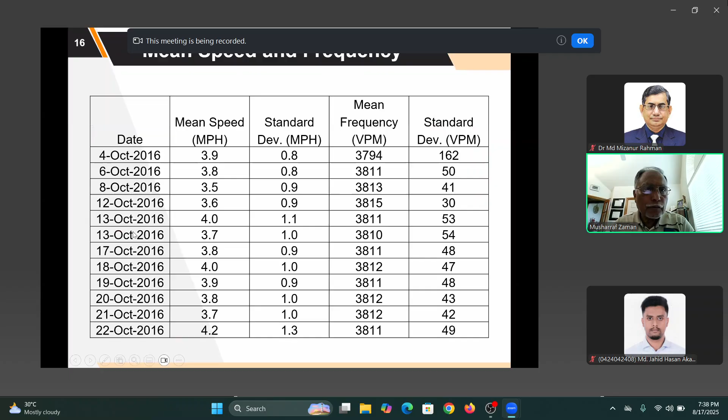So this particular technology that we have is called intelligent asphalt compaction. And the one that we have, and we have a patent on this particular technology, is called Intelligent Asphalt Compaction Analyzer. It is abbreviated as IACA. And what does it do, this particular technology?

It's essentially a tool for quality control of asphalt pavement during construction. That's important, during construction.

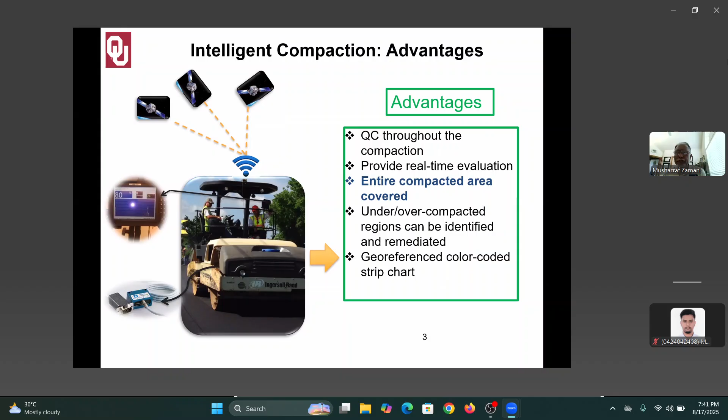So overall, I'm going to give you a very brief description of what it is. This technology is based on vibration. As you know, this compactor - I'm sure most of you have seen pavement construction - it is a vibratory compactor.

The compactor has kind of an eccentric weight. It vibrates, so that vibration - what we are doing is we are recording the vibration in real time.

So we have an accelerometer that measures the vibration, and then we have tools, and of course we have GPS, and also we have a temperature sensor, because temperature is also extremely important in this process. So the GPS antenna looks at the location, then vibration of the compactor is recorded in real time, and also the temperature, and then it is processed also in real time, and then it displays the level of compaction.

Now, one thing is very, very important to note here - so you're compacting the asphalt layer that you're constructing, but it is placed on other layers, right? As you know, asphalt pavement is a layered system. So you have subgrade at the very bottom, then you have some base and sub-base, and on the top you're doing your construction.

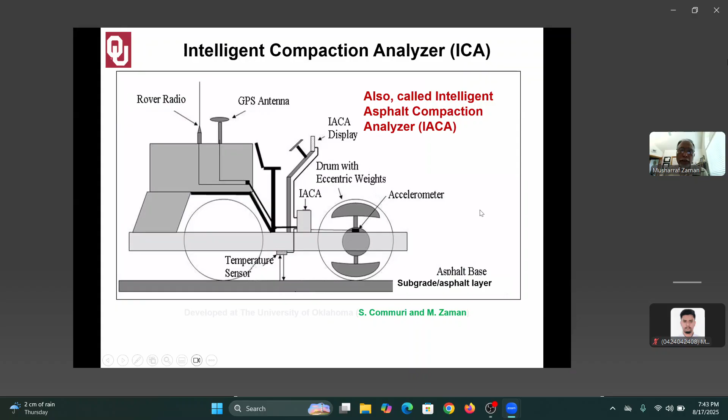So actually this vibration, as you know, it's a coupled system. So how the compactor is going to respond depends on what you have below. So it's a coupled system, that is something. In other words, as you're compacting and the asphalt layer is getting more densified, the nature of the vibration is changing. So there is a video here that will tell you.

I hope that you can listen. You have the sound also.

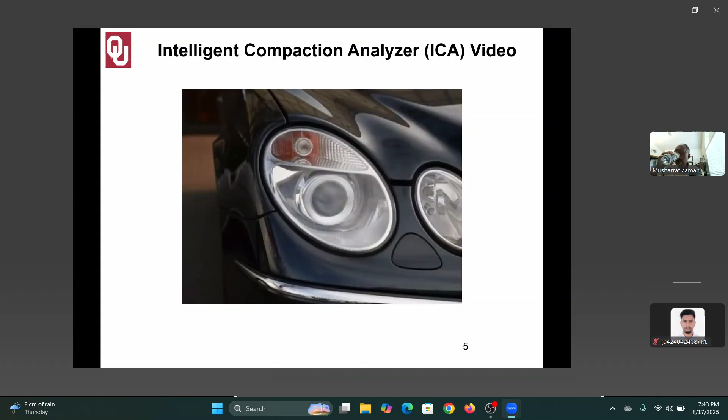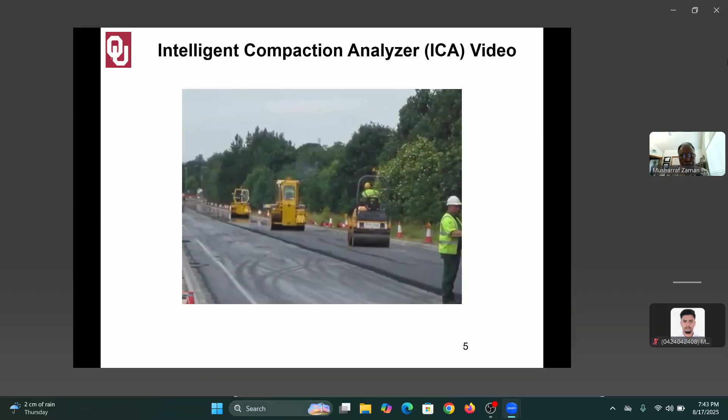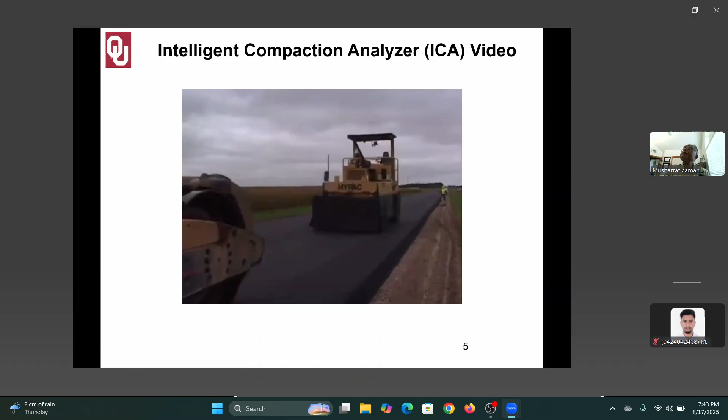We expect performance and long life out of so many things we buy, from our computers and appliances to the vehicles we drive. Why not the same for the roads we drive on? Generally, pavement performance is not something motorists think about, but it is something pavement engineers think about a lot. And engineers know that achieving good compaction during construction is the most economical method of increasing the lifespan and performance of asphalt pavements. Compaction increases pavement density, which makes our roads stronger and less prone to cracking and rutting. Longer-lasting roads mean fewer work zones, delays, and lane closures. Better performance means a more comfortable ride.

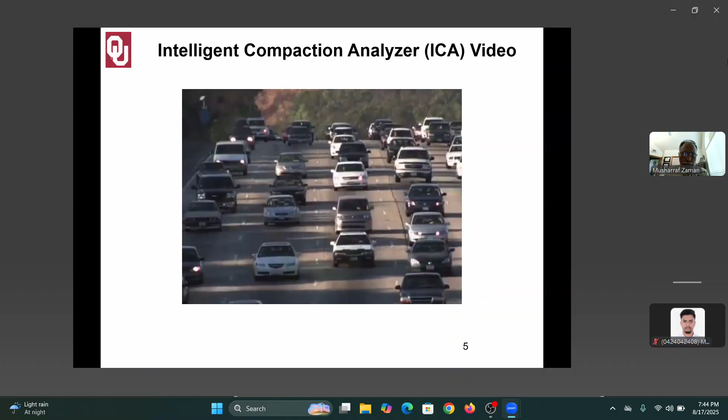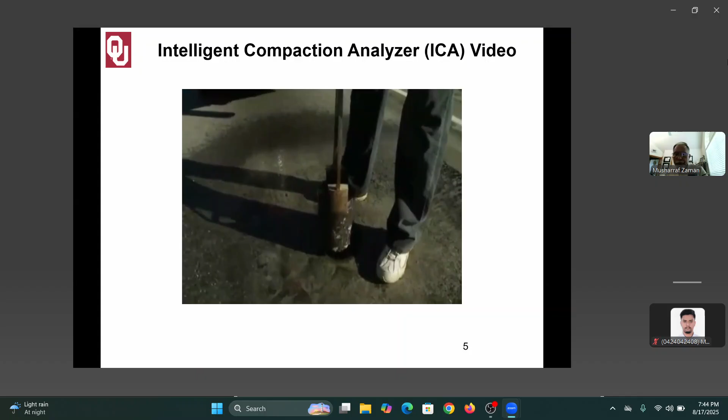Traditionally, asphalt pavement is tested for density after rolling operations are completed. Conventional quality control techniques are often time-consuming, costly, and can be destructive. Pavement cores are extracted and analyzed after completion of the operations. This method checks the pavement at individual points and does not reflect the overall quality of the entire asphalt pavement.

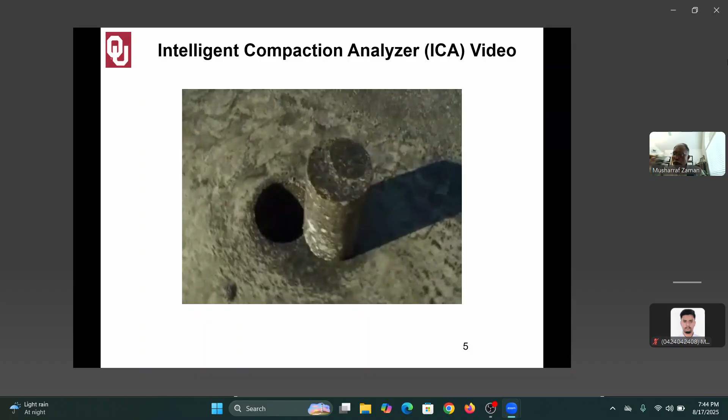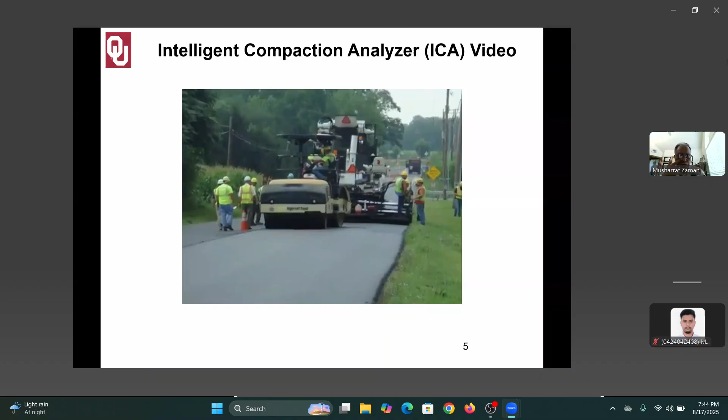The Intelligent Asphalt Compaction Analyzer, or IACA, is a roller-mounted device that provides real-time data on compaction inconsistencies during construction of asphalt pavements. The Highways for Life Technology Partnerships Program provided a grant to Haskell Lemon Construction, in partnership with the University of Oklahoma, to refine and test the IACA technology.

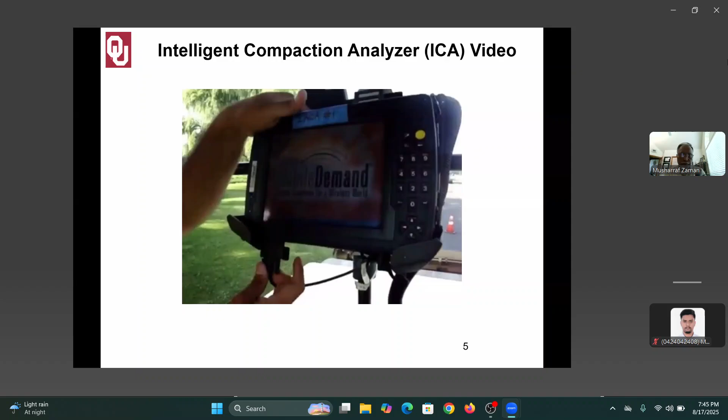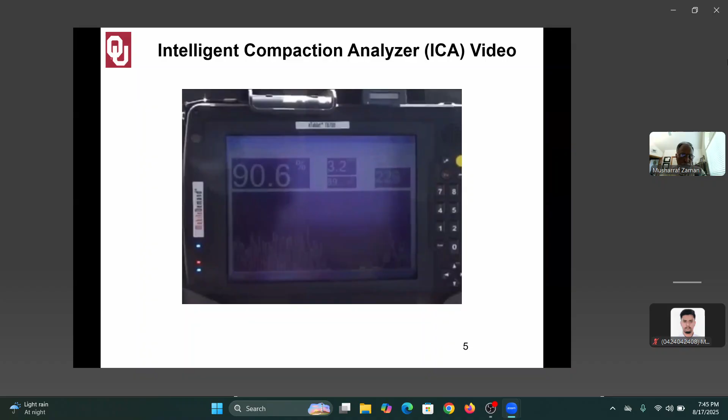The prototype, consisting of a global positioning system receiver, an accelerometer, and a rugged embedded computer display, is easily installed on a vibratory compactor. When mounted on the asphalt roller, the IACA analyzes the pavement's response from the roller vibrations in real time, estimating pavement compaction while the pavement is still pliable in order to address issues relating to compaction.

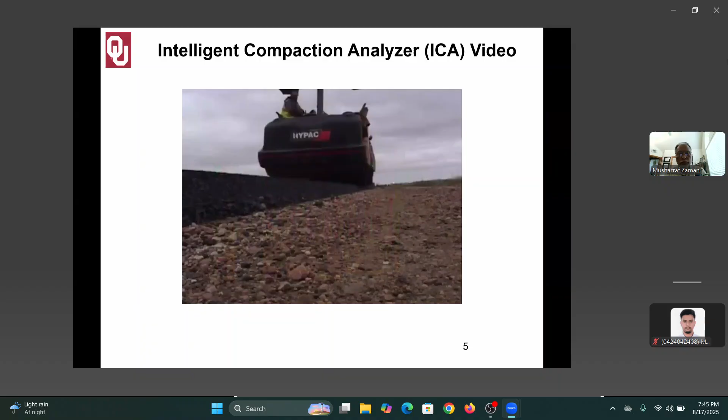Density information from the final pass of the roller is used to compile the density of the pavement, and the color-coded map display is easy to read, enabling roller operators to view the information on the monitor and determine when adequate compaction is achieved. The results of the evaluation and testing showed that the IACA could estimate the level of pavement compaction with accuracy suitable for contractor quality control operations.

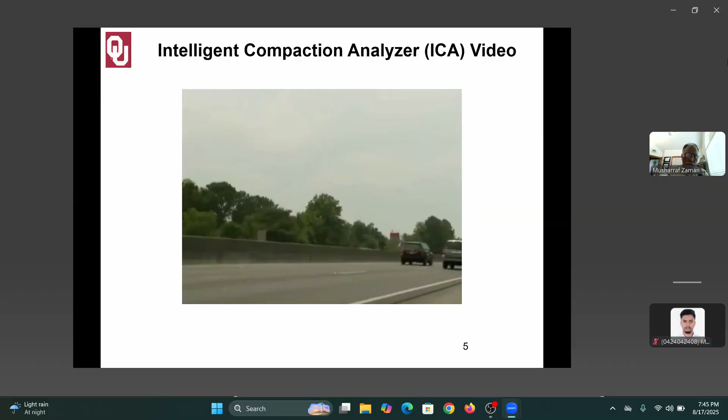The ICA can help improve the quality of asphalt pavements, increasing their life and reducing maintenance costs. It also increases efficiency and productivity on the job by reducing the number of conventional spot tests needed and excessive rolling. It takes the guesswork out of paving jobs.

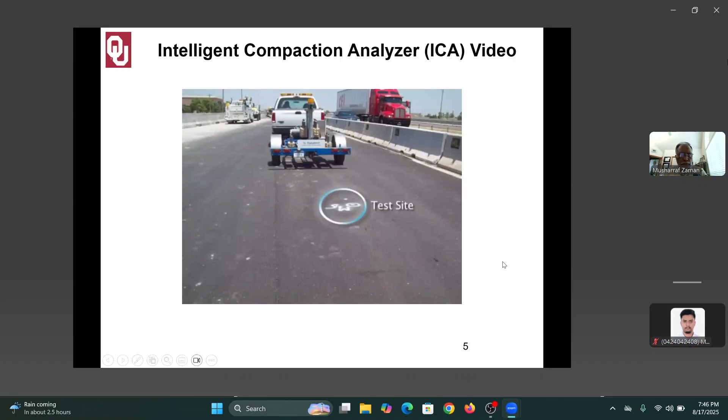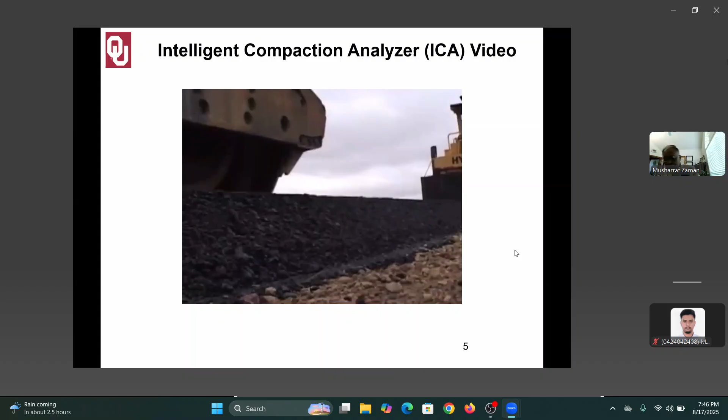Construction of properly compacted pavements will result in a long-lasting roadway that does not require expensive, time-consuming, traffic-disrupting reconstruction and major repairs. For motorists, this means longer-lasting roads and a smoother, more enjoyable ride.

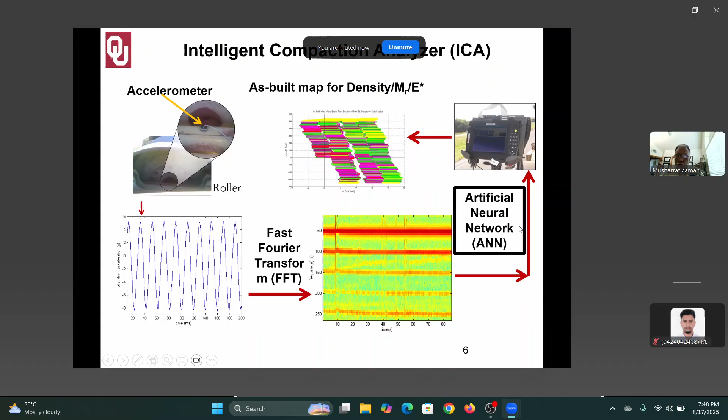So as it goes through the number of passes, it will recognize the level. So this is essentially what we have, and the results of the level of compaction is displayed, as you saw in the video, in real time.

Now there are a couple of terms that we use. CCV, this is the Compaction Control Value—that's one of the parameters that some of these intelligent asphalt compaction machines use. Or CCMV, the Compaction Control Machine Value, and things like that.

So I just wanted to make sure that you're familiar with this technology, familiar with these terms actually.

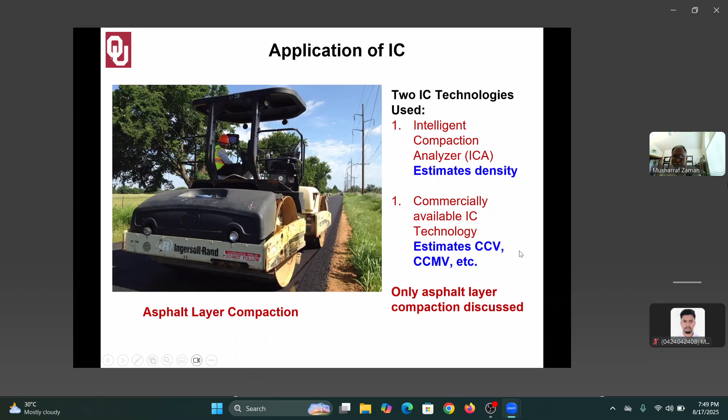Essentially what is happening, as you have seen in the video, is that it records the vibration, and in the very beginning, the first pass—that's called lay down—and then additional passes. So the very first pass is the lay down, and the machine itself, when it is laying the asphalt, that's what we call lay down density, and then additional compaction you receive through the vibration of the roller.

And even after the asphalt is constructed, still some additional compaction happens from vehicles, like big trucks and so on.

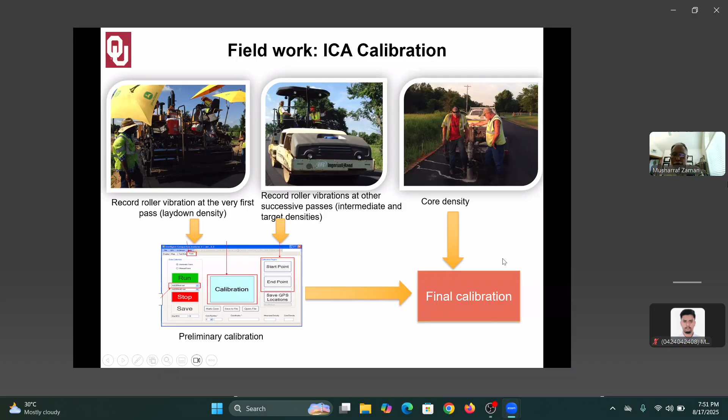So that's what you do. But in order for this technology to work, you have to calibrate. Calibration is the same type of thing as when we learn something - our memory gets information about new data, new tools. The same thing is true for artificial intelligence, neural networks. So the calibration part is extremely important. Your knowledge is as important as whatever you have learned. The quality of calibration will dictate the output that you get from an intelligent asphalt compaction analyzer. So how do you do that?

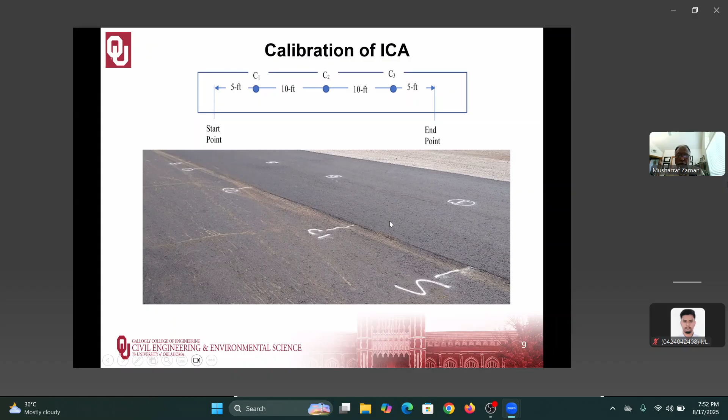So this is where we're taking cores. Of course, taking a core is a destructive process, so our goal is to minimize the actual coring. What happens is that as you do more and more construction and you are retraining this neural network model, it is becoming more and more powerful - the same way that as you learn new materials, you train yourself, your brain gets trained, and you become more experienced. Essentially, the same thing is applicable here for this technology.

So this is what happened. The software that's used to process the data is called VETA. We collect the data, and this particular software, by the way, anybody can use it - you can download it. It's a free download. So that's what we use in our case for processing the data.

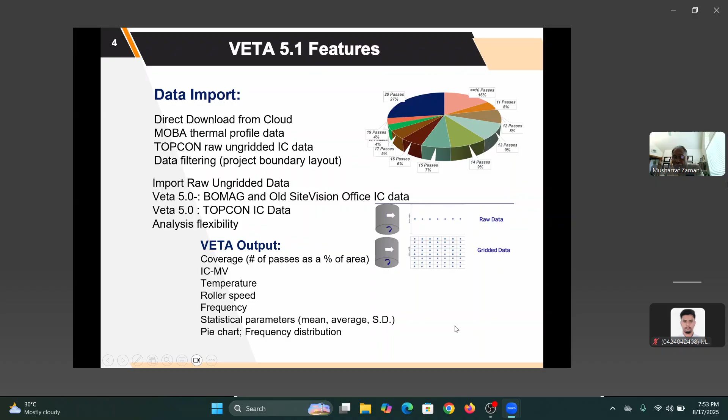Essentially what this software does is it takes the pavement like a grid, and then it tells you the number of passes - what areas received what number of passes, 1, 2, 3, 4, like that. It also tracks temperature, roller speed, roller frequency, and it gives you the data results as a pie chart. I think this is very helpful because this software is already there.

In our case, I'm going to present only one example. We have done this for a number of projects with my students, so I'm going to cover only one of the projects, Highway 38 in Oklahoma.

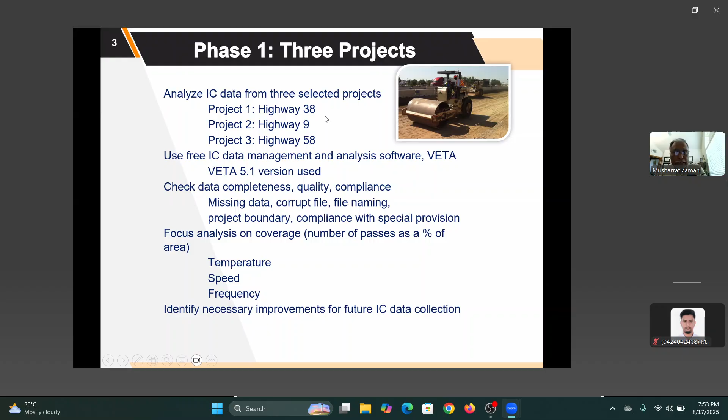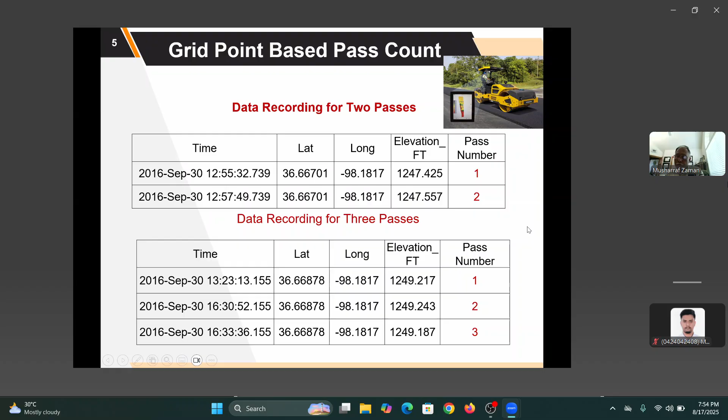So how does it actually know the number of passes? It is based on latitude and longitude. Because we have GPS, from the GPS it actually knows the latitude and longitude, which indicates the location of the roller. You can see that it matches exactly the latitude and longitude for the first pass, second pass, and in the second case, first, second, and third. So latitude and longitude are used as reference in this particular case.

In order for this to work, what you want to do at the end is find out what percentage of the road you're constructing received one pass, what percentage received two passes, what percentage received three, and whether your construction is maintaining quality. In our case, the Oklahoma Department of Transportation has limits - if you do a good job, you get a bonus; if you do a bad job, you get penalized. Our goal is to help these companies so they don't get penalized, they get a bonus instead.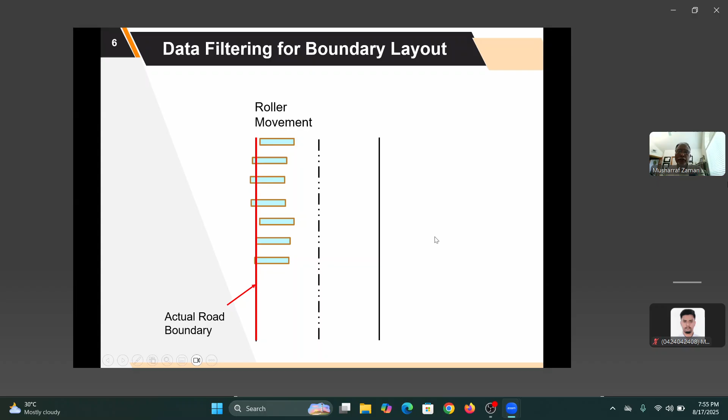So this is where it becomes a little tricky - you have a turn like this, as I have shown in this diagram.

You have to have the right boundary. That's it, right boundary, because otherwise whatever results you get would not be correct, right? So that's one of the things.

I want to show this example for Highway 38, one of the roads. This is an overlay type of project, width is 16 feet, about 11,160 tons. This is S4, the superpave mix S4.

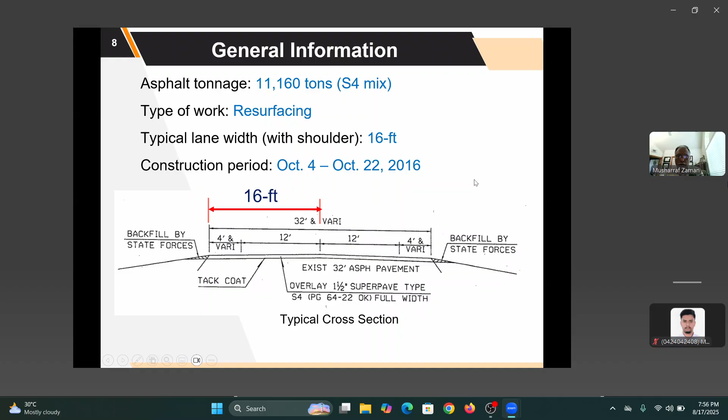I think we can talk about this, and Ashik may be able to cover more in his presentation. It's a resurfacing job, right? Quite a little. Yeah, so anyway you can see here the results.

I think this is very powerful. You can see here what is our target? Our Oklahoma DOT's target is that at least all of the areas should get 2 passes, right? 2 minimum. And you can see these are the passes: 1 pass, 2 passes, 3 passes, 4 passes, right?

On that particular day, October 4th, do you see that only 52% of the areas received 1 pass, 30% received 2 passes, and so on and so forth.

So what can happen sometimes, and this is a good tool because it is good for the DOTs to also see whether the contractor is meeting the DOT requirement or not.

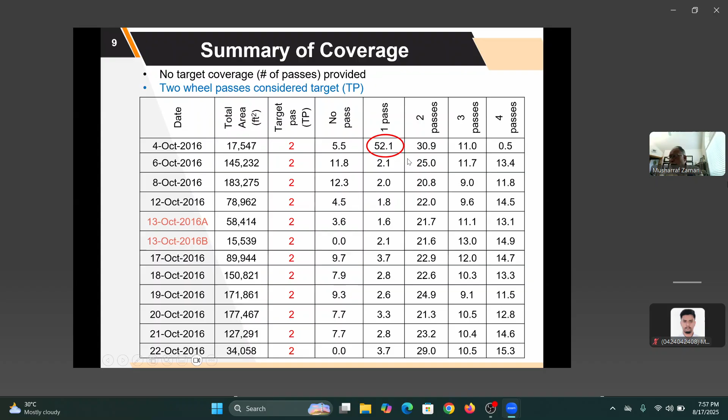One more important thing is that you do not also want to over compact, because that is also not good. If you over compact, there will be breakage of the aggregates and so on, right? So that would also not be good.

So that's why you have to have a limit, and you can see that on some days the contractor met the limit, and on other days they did not.

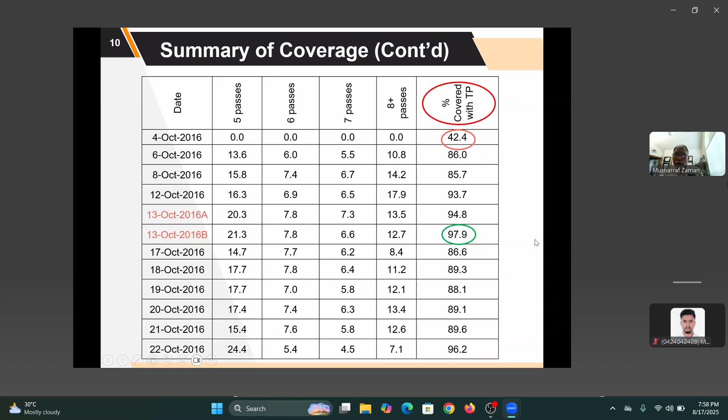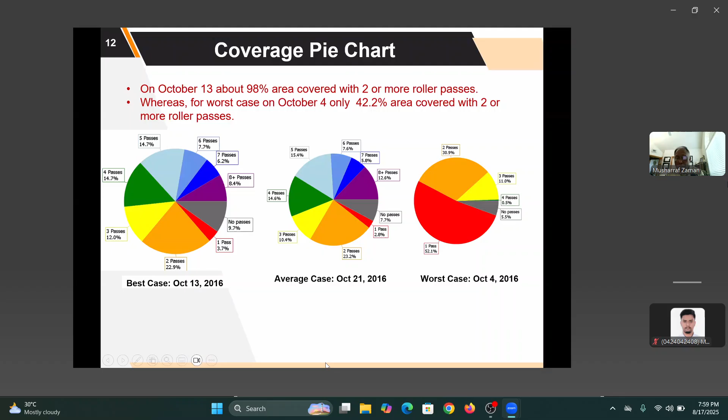In real time, so you have the opportunity to go back and fix that. If you have only 1 pass and your target is 2, you look at the area that received only 1, and you can correct it in real time, which is very difficult because you cannot do this once the asphalt has cooled down, you cannot change it.

The other thing is temperature. Temperature is very, very important, right? So DOT has a temperature requirement, minimum and maximum. You can see here that on some days they met most of the temperature requirement.

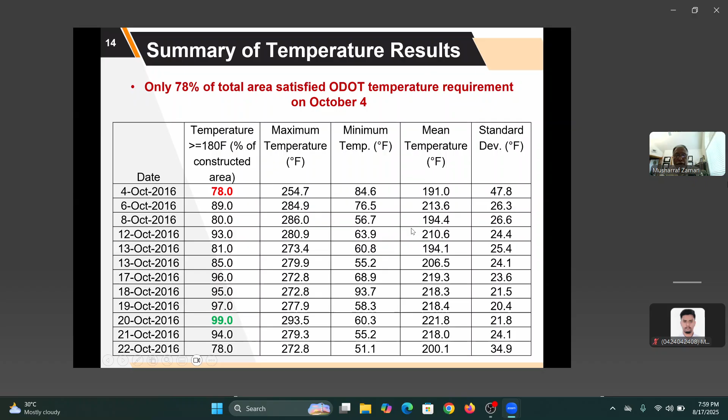This is again Oklahoma DOT. In Bangladesh, I don't know, you could probably have some temperature requirement as well. So on some days the temperature requirement was not met. Only 78% of the areas constructed met the temperature requirement.

And this type of tool also gives the speed of the roller, the standard deviation, and frequency of the roller. So these are, I think, very important.

You can see here, I think they did a pretty good job overall, right? You want to keep this as uniform as possible, right?

That depends on, I do not know if any of you have had the opportunity to actually be on top of a roller, like driving the roller - I did, it's very high up. It's like you're riding an elephant, right?

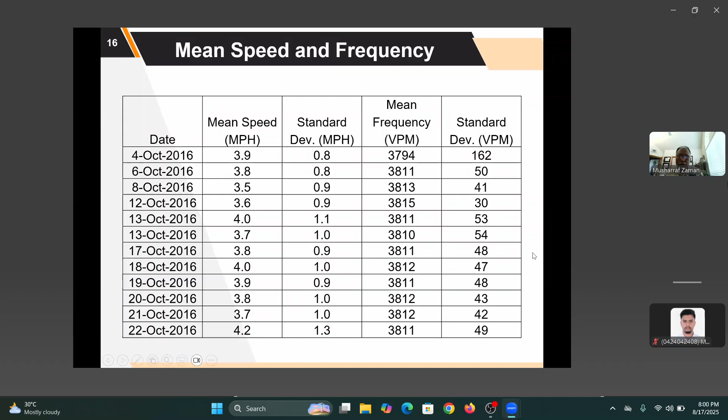You get this type of results also. So I'm not so... um.

Basically, I think in this case you can see that the results overall dependability was pretty good, because this is a difficult job, right?

You cannot expect if somebody says that I got an R-square value of 0.99. As Dr. Mizan said, that I am the editor-in-chief of a journal, so when I get that type of paper, I actually laugh myself because that's not doable.

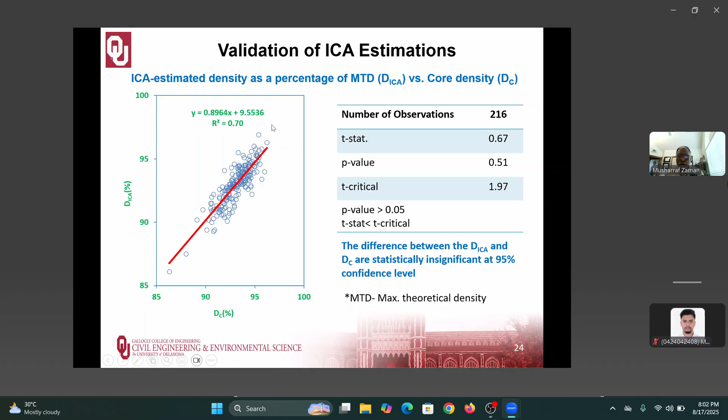So you can see here that our actual compaction, the density from the core, versus the density as predicted or measured by our system, ICA. We got R-squared equal to 0.7. I think that 0.7 is good. You cannot get 0.9, that's impossible. So we have to be aware of that.

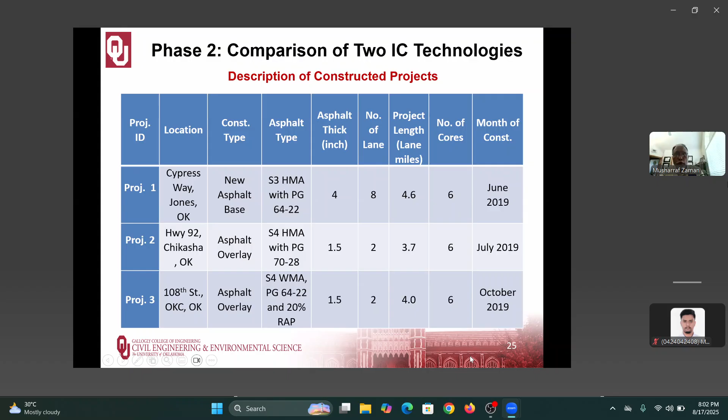This is kind of we have done a lot of different projects. I don't think there's a need to go through all of these because there will be differences. It depends on the operator. It depends on, sometimes the mix quality could also be a factor because some mixes are relatively easy to compact and others are difficult to compact.

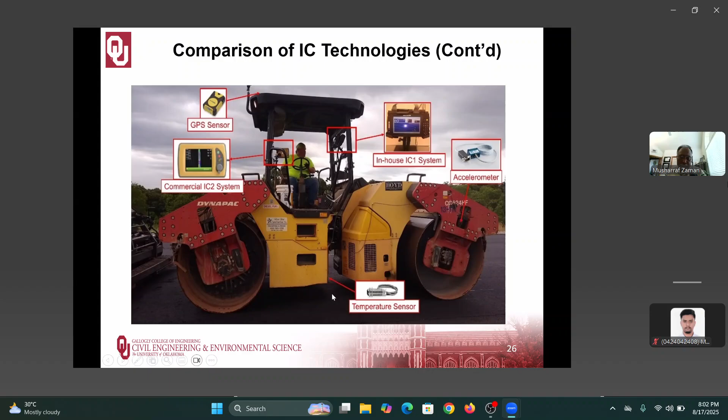There are different intelligent compaction technologies. I talked about the technology that we developed at University of Oklahoma along with Haskell Lemon Construction. So there are some comparisons. I'm not going to go over this, but I think I can make a copy of these slides available to you, so you can actually go over this yourself.

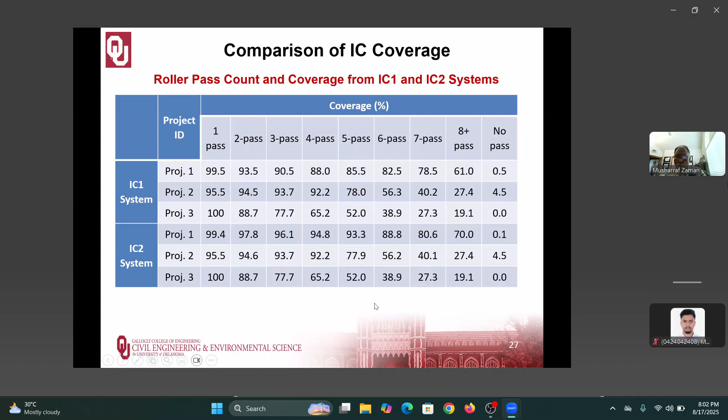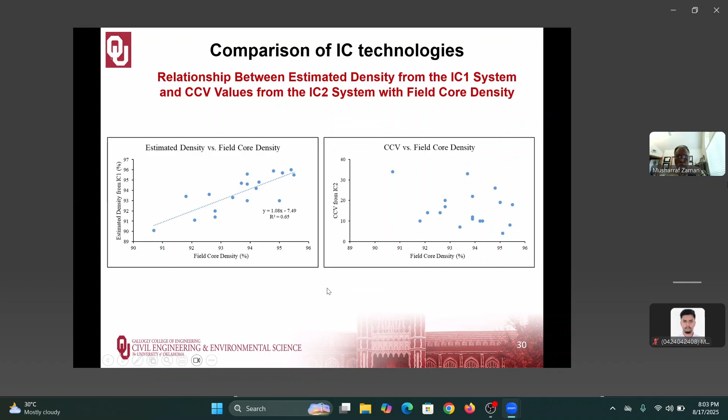So we have been working on this. Neural network is a very strange thing, right, like any other model, depending on what you are doing. If you use a regression model, for example, you divide your data into three parts. One part you use to develop the model, the second you use to check or validate, and the third used for prediction.

Usually regression models are very good for predicting the data that you used to develop the model itself, that makes sense, but not necessarily. So all of these tools have difficulty: if you are doing interpolation, it's good. But if you're doing extrapolation, meaning you face a situation you have not seen before, then you'll think twice before making a decision. Same thing is true for these neural network and other models.

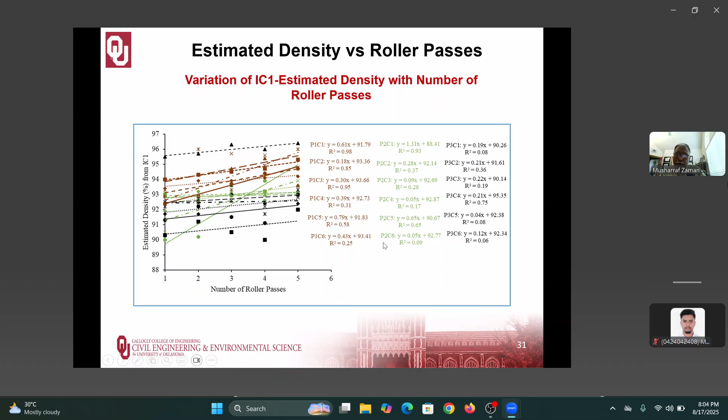There are all kinds of models, random forest model, you just name it. They are pretty good tools for interpolation, but not so good for extrapolation. That's one of the things. I'll share all of these slides with you.

Overall, I think this technology, intelligent compaction, is very helpful because you are able to look at the quality of a construction in an overall sense that you cannot do with the existing technology, spot checking. So it's like you're buying a shirt, but the shirt has a hole, but you did not look at that hole. That's the type of thing that's happening here.

You have to have the DOT, like here in Oklahoma, they have some standards, special provisions. We have to meet those, and if you meet or exceed them, then you get a bonus. If you do not, then you get penalized. So really, our goal is to help both the Department of Transportation, who own our roads and bridges, and also the contractors, because they are the ones who do the construction.

So we need to look at, and as I have indicated, your boundary is important, you have to look at your construction boundary properly. Otherwise, the percentage we are talking about, 80% coverage, all of those things would be wrong, because it's a very simple thing, it's geometry. So we have to define the geometry of a pavement properly, and then you can look at all of these, the compaction control value.

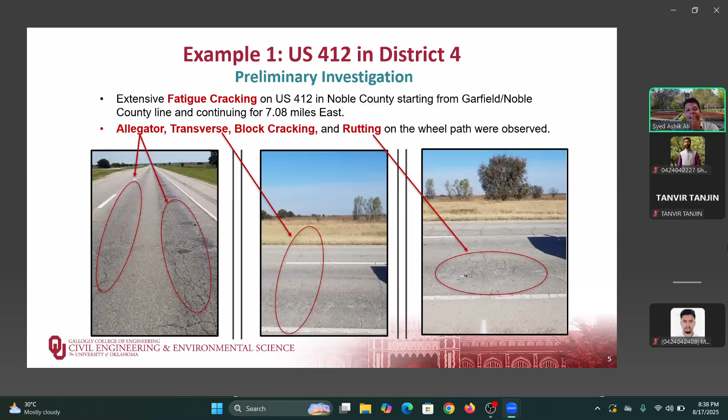We also use Google Earth imagery sometimes. Google Earth can give you year-wise images if they have that in their database, which helps us find out where there is any significant difference in the distress we are seeing.

At the beginning, what we try to do is collect all the documents available at the DOT level, like construction documents, as-built construction, or any other design documents that they have.

We found that in 2006, the ADT was 5,500, and the road was designed for 6.7 million ESALs, which is pretty normal, a pretty good ESAL value.

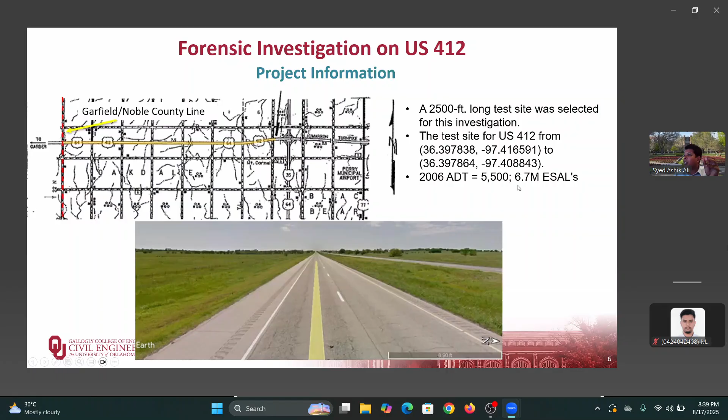But with that ESAL, it should not crack, because the original pavement was there from 1969, more than 50 years. So that's good, it has been serving well.

But what the DOT was doing is whenever there was a problem, they would go there, take 2.5 inches from the top, and put a new 2.5 inches over it. They did this for quite some time, without doing any major rehabilitation work on this pavement.

They were just doing what we call milling and filling—milling a portion of the top surface, then filling it back with a new mix.

So the last milling and filling was done around 2009. The design was done in 2006, then they did this overlay around 2009. Generally, an overlay lasts 10 years or more.

But they started seeing problems much before that, even though they came to us more than 10 years later. That's why they are more concerned about what went wrong with this construction work.

So we went there and spent a whole day on that pavement. We closed the outer lane for about 2,500 feet and did coring and lots of other testing.

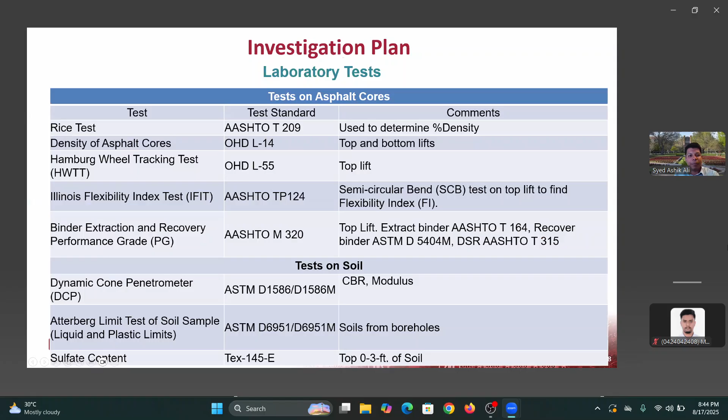We used the falling weight deflectometer—I think I have a picture of it earlier. This is the load, and there are around 6 to 7 sensors that read the deflection. It puts an impact load of around 9,000 to 12,000 pound, and then reads the resulting deflection.

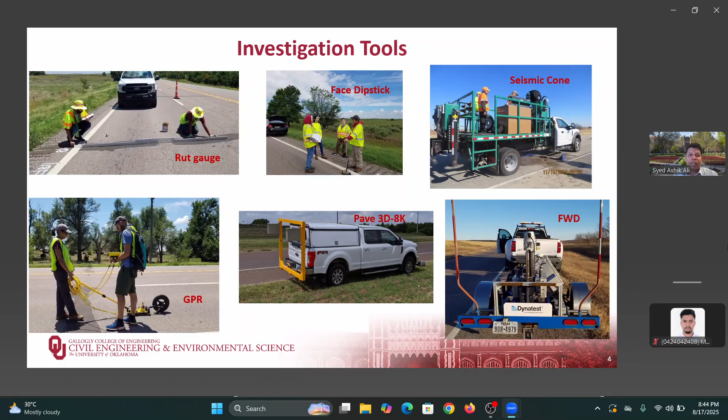And from that, you can actually back calculate the stiffness of your pavement, different layers of your pavement. So we contacted a company and they did the falling weight deflectometer throughout the pavement. Around 20 FWD tests were done at different points, and these are the results.

So the deflection of the point, the normalized W1 deflection, which is just underneath the load, from that we calculated the modulus of different points, different locations of that test section. What we found was the deflection was pretty high, and the average modulus value was 121 KSI, kips per square inch.

So in the US we generally go with the FPS unit, feet pound second. A kip is 1,000 times a pound, 1,000 times a pound.

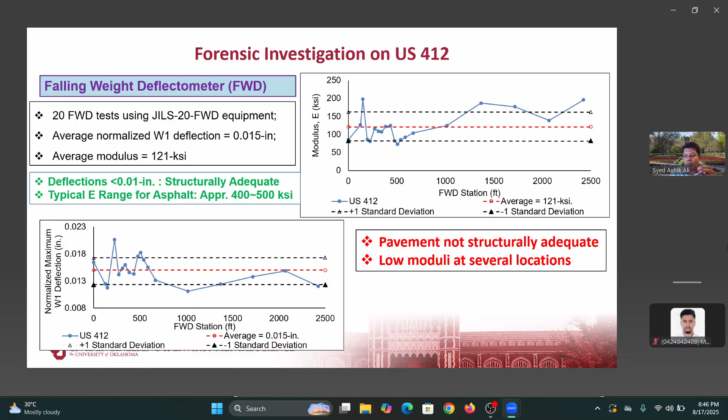Generally, if the pavement is structurally sound, the deflection should be less than 0.01 inch, and the modulus value should be around 400 to 500 KSI range, whereas we have seen very low, 121 KSI. So that tells us this pavement is not structurally adequate. The modulus value is very low.

So we also tried to find out the extent of the problem - whether the cracking, rutting that we are seeing is throughout the test section, or how bad the cracking is, how bad the rutting is, how bad the IRI, International Roughness Index, is.

So for that we use this equipment, this vehicle. This is called the PAVE 3D 8K. Our sister university, Oklahoma State University, developed this technology. It's a laser-based technology that runs at highway speed and shoots laser on the pavement.

And from that it can actually map the pavement surface, making a 3D model. From that we can calculate how much area is covered with cracking, how much is your rutting, how much is your IRI. We can get that from that vehicle.

So this is a very neat tool, and they've been working on it for quite some time now. They can actually see micromillimeter cracks through that laser device. Lots of research has gone into developing this thing.

So we found that the pavement IRI is very high, around 568 is the highest number we found, whereas generally if it's more than 170 inch per mile it's considered very bad. So there's very significant distress on that pavement - it's not in any functioning condition.

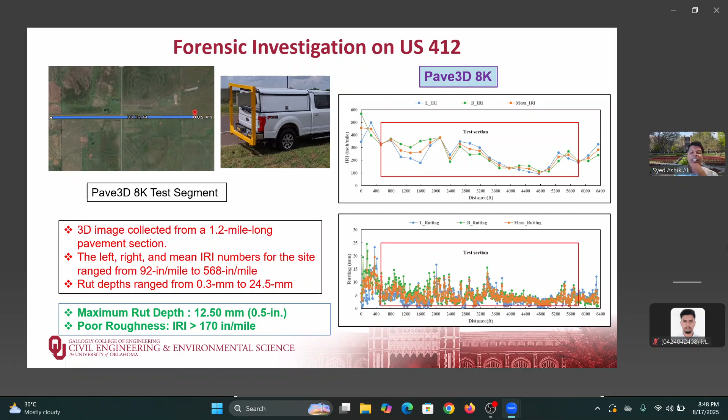Then we wanted to find out what actually happened, because we cannot see underneath what is going on. The pavement - we always found it difficult to know what is the condition underneath the surface. We do not know that, so looking at the subsurface condition is very, very important.

So we found that using ground penetrating radar is a very good tool to look at what is going on at the bottom of the surface, the subsurface - whether the cracking and rutting we're seeing on top extends down, whether the whole pavement layers have this problem, or if there's a problem on the subgrade that is reflecting on our pavement. So ground penetrating radar is a very good tool for that.

So how do we do it? We ran the GPR in the transverse direction and also in the longitudinal direction, multiple times, on the wheel path and non-wheel path at different locations to see the extent of this problem.

So we have seen - just look here, can you see my mouse? So here, the asphalt pavement layers are all disintegrated. It has collapsed - almost nothing is there, no structure there. It happened because of some bottom-up cracking, and the cracking is going from the bottom to the top.

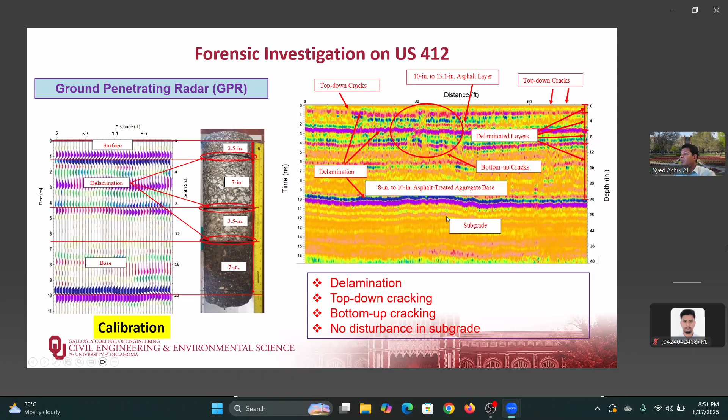We also did the same thing on the longitudinal profile as well. We tried to find out the longitudinal pavement to see the extent, is it more localized or is it almost everywhere? So the test site that we selected, almost everywhere we have seen disintegration in the underneath layer of the pavement, and delamination is all through the pavement layers, in all cases, the wheel path and also in the center of the lane, meaning the longitudinal non-wheel path locations. Wheel path has more disintegration than the center lanes.

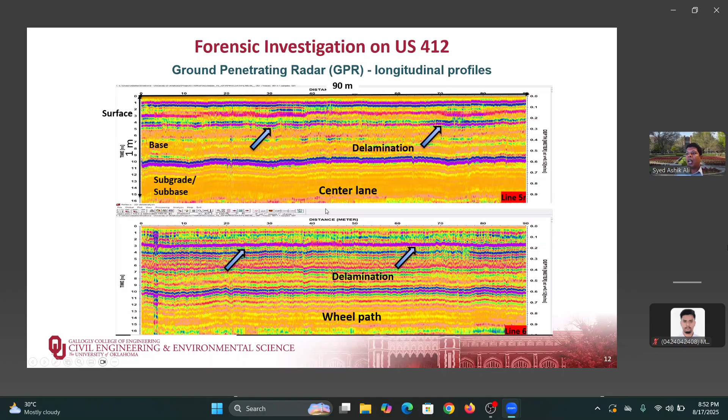So the core we took out - we also wanted to see the core, as I have already mentioned. We take out the core, we will see what is going on. Obviously we have seen delamination, some moisture intrusion and stripping. You can clearly see it from here. So there is some moisture problem, obviously.

We also tried to look at it using a camera. We tried to find out whether all the cracks are top-down cracking or bottom-up cracking, because top-down cracking has a different mechanism than bottom-up cracking. Anyone can tell me why, what is the mechanism for top-down cracking and what could be the mechanism for bottom-up cracking?

Any idea why we may have bottom-up cracking? Maybe due to poor binder selection, sir. Poor binder selection, yes, that could be. But I'm talking about the mechanism. So why do we see bottom-up cracking?

So see, this is my pavement, right - let's consider this is my pavement. When the wheel loads are applying a load, right, a truck and everyone is coming, this is applying a load. And if your pavement layer is like this, it will try to bend in flexure, right, your pavement layer will try to bend in flexure. So when that happens, you're going to see tension at the bottom of the asphalt layer and compression on the top of the asphalt layer. So because of the tension, if the tension is too much, then the bottom will crack. And then with more and more truck loads, more wheel loads, that crack will open up and it will try to propagate from the bottom to the top. So that's bottom-up cracking, right, that's because of the fatigue or less flexural strength of your asphalt layer.

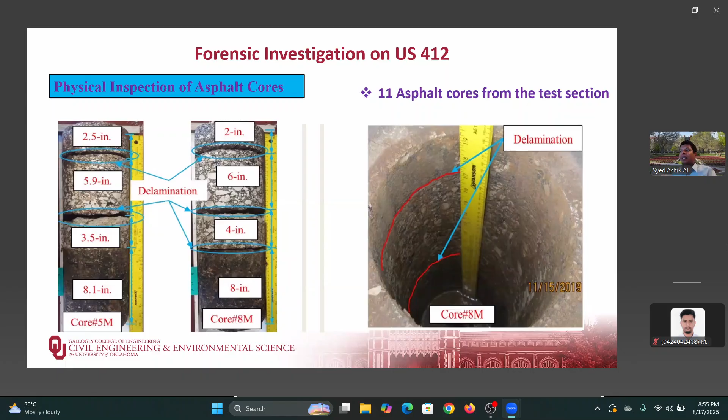So here actually the pavement was so bad - the crack, we have seen top-down cracking, we have seen bottom-up cracking, and in some places the top-down and bottom-up cracks actually connected to each other and completely disintegrated the pavement. So here, we actually took out the top portion and we have seen, this is the bottom-up cracking. It can generally, like if you take the top portion out, you can see the way it propagated from the bottom to the top.

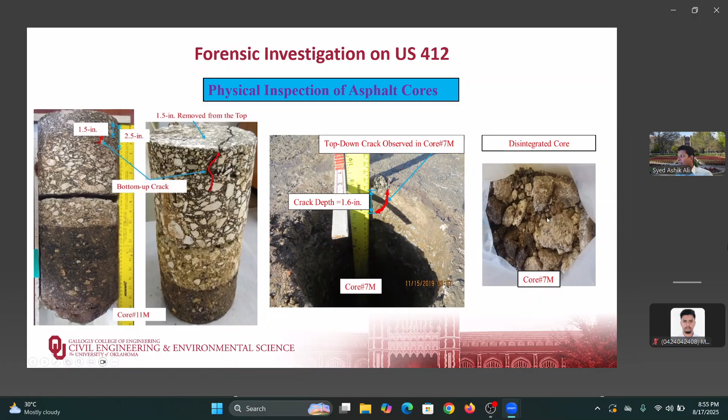When the top and bottom crack connect, that pavement section completely disintegrates. So this is what happens in one of the cores when we try to take it out. It's completely disintegrated; there is almost no structure left on this one.

After inspecting the asphalt cores, we generally try to find out the thickness of the different layers, and also try to physically determine whether there is delamination, stripping, and what type of cracking we are seeing. So these are the general conclusions we got from the physical observation.

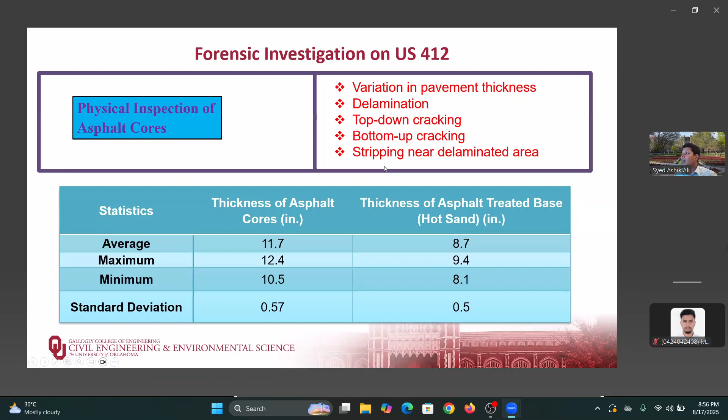Although the GPR showed there is maybe not much problem on the subgrade, when we were there that day doing the investigation, we thought to get whatever data we can. So we also did some subsurface, subgrade investigation as well. We ran a DCP there and found the CBR value, or the modulus value, of that soil.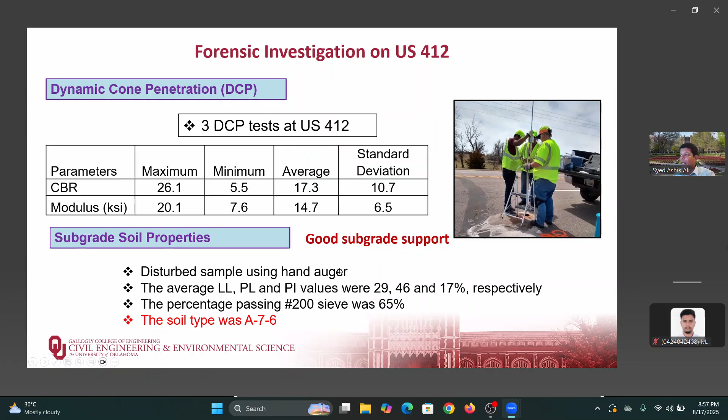Around the same time, we did another test called the seismic cone penetration test, SCPT. This gives you the friction tip resistance, and also helps you understand the N value, or the bearing capacity, of the particular pavement section. We contacted a company and they helped us do that seismic cone penetration test.

Generally, seismic cone penetration is not done for pavement purposes; it's more for when you want to investigate the geological portion, like for a bridge. But even from this test, we found that the moisture state in the soil is at a critical state.

The pavement has been there for 50 years, so it has sustained for 50 years, and the subgrade has stabilized. The subgrade is not moving; the moisture and soil layers don't have much interaction left. So that soil has reached a critical state, with good strength as well — a stiff, compacted subgrade soil, and the N value was pretty good.

So we concluded that the soil is not the problem. The problem is on the top layers.

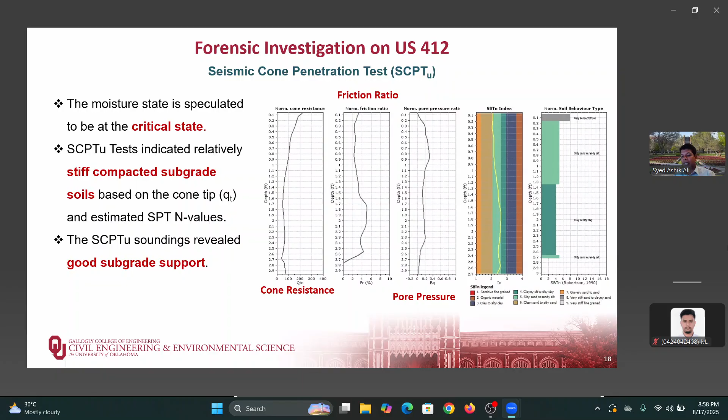We did a sulfate test on the soil sometimes, because in some places in Oklahoma there are sulfate problems. When you have a sulfate problem and use any kind of soil stabilization, like lime or cement stabilization, it can expand — there is a chance of expansion of that soil. So the presence of sulfate is very important to understand.

We did that test just to take this out of our minds, and we confirmed there is no sulfate problem in that area. The sulfate values in ppm are very low — the acceptable range is less than 8,000, and we got around 120 to 140. So we are not worried about sulfate either.

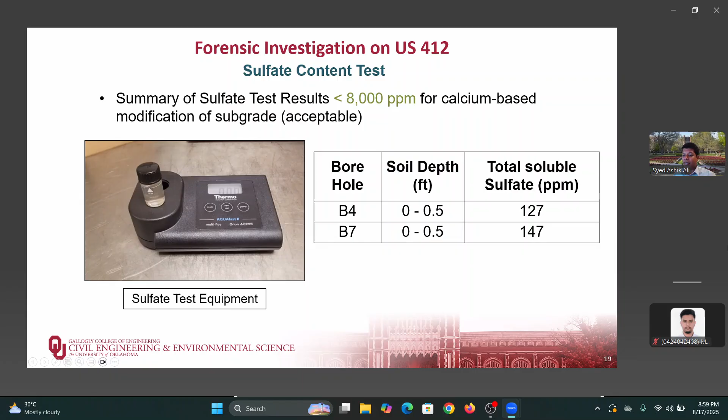Now, when we got the core, we took the top portion out, cut it, and determined the density. This is where the actual reason for the problem comes in. In Oklahoma, the target density for road construction is generally 92 to 94%. Dr. Zaman mentioned the construction side of this, how we can make sure we have enough density — when they construct this, the target should be between 92 and 94% density.

After 10 years, when we went back, took out the core, we found the average density on the top layer was 92.7%, but in many cases it is lower than 92%. Generally, after 10 years, we'd expect a density around 95% or more, because 10 years of traffic should be able to compact it enough, right? So that could be a big problem.

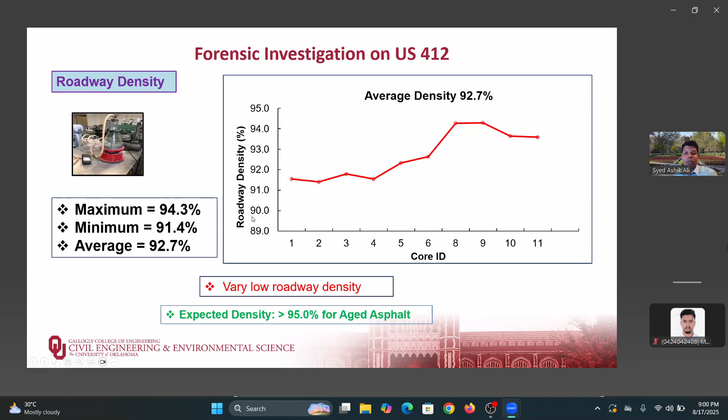Maybe they were not able to compact it to the right density they wanted. That's probably one of the problems. We were expecting more than 95%, and we're seeing around 92%, 93%. So obviously, if your density is not good, your pavement is not going to perform well. It will not be durable.

We also did some testing to find the current condition of cracking resistance, called the Illinois Flexibility Index test. It gives a value, Fi. If it's less than 8, it's bad. If it's more than 8, it's good. We found the Fi value of the top course to be very minimal, so there is no way this asphalt mix can sustain any kind of cracking.

We also took out the core and extracted the asphalt binder from it, and did some grading to find out how oxidized this material is. Generally, in those pavements, we use a material with a PG temperature of 64 or 70 degrees Celsius. When it gets oxidized, the PG temperature goes higher. Here we found the PG temperature to be 112.9, so that pavement has been oxidized significantly. That's why we're seeing top-down cracking as well. Overall, the subgrade was good.

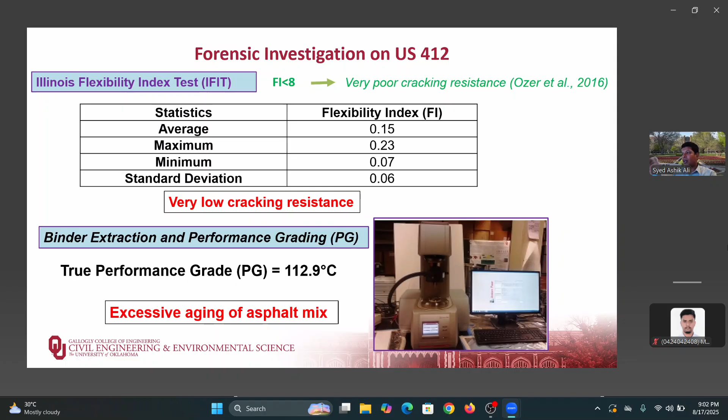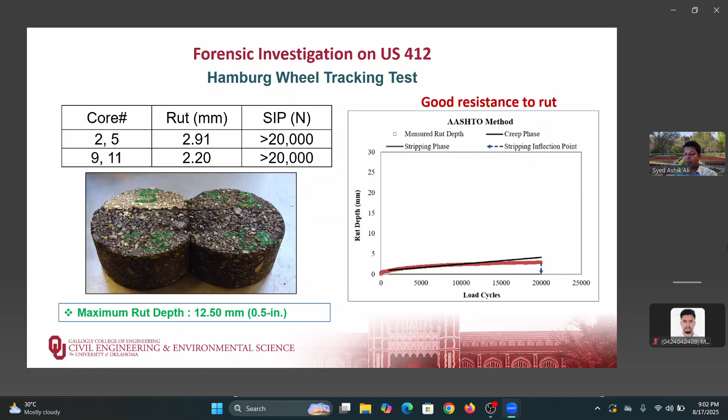We also did rutting testing to find the rutting resistance, and found it was pretty okay - the pavement was not that rut-prone. But because cracking has happened, that has led to more rutting in that section. So this is the ultimate conclusion: the subgrade was not responsible for it. The binder was highly oxidized, so we requested ODOT to look at what binder was used and how the construction was done. Delamination and stripping had occurred.

So now, think about what should be done in the future - how can we rehabilitate this pavement? If we want to decide what to do, we need to find out the extent of the problem. We've seen delamination in almost every layer, and stripping in almost every layer. So that's the problem - we need to do something about that.

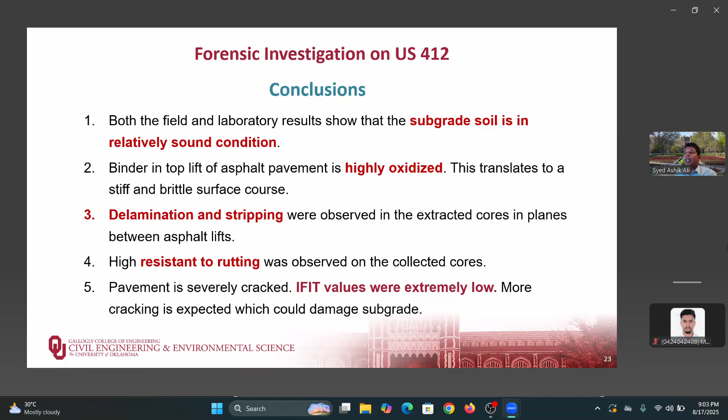Resistance to rutting was pretty good, but cracking is actually the leading problem here, and the pavement is severely cracked. More cracking is expected, which could damage the subgrade. As more cracking happens, the subgrade can be affected over time. So what we do is, we don't give DOT just one solution - we generally give recommendations ranging from least cost to most cost.

The least cost option was to just do a mill of 1.5 inches and fill it back with S5, a very fine mix, with PG70, a slightly stiffer asphalt mix that helps give strength. If you have a little more money, you can do the next option. And if you have enough money, our final recommendation was to take out the whole asphalt section and do a complete full-depth rehabilitation of the pavement.

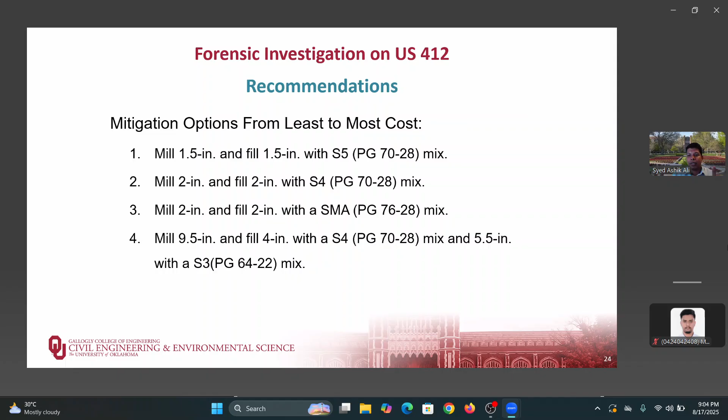That's the way they should do it: have 4 inches of S4 PG70 and 5.5 inches of S3. So at the end, we give them this recommendation, and then it's up to the DOT, Department of Transportation, to decide which option is viable for them.

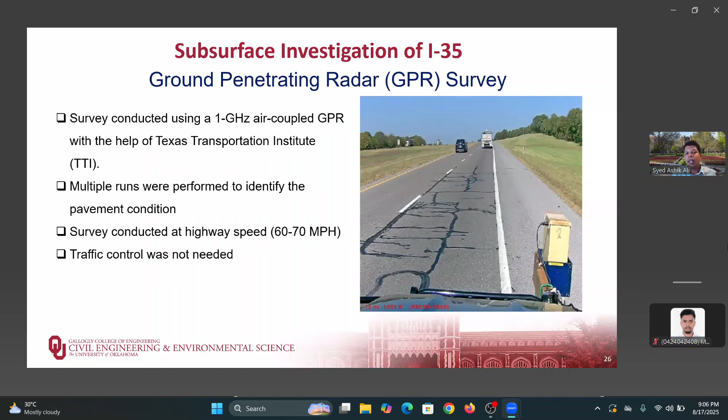We got the same results as the previous method. So that's one tool we have used with TTI very significantly. I don't want to go over this further.

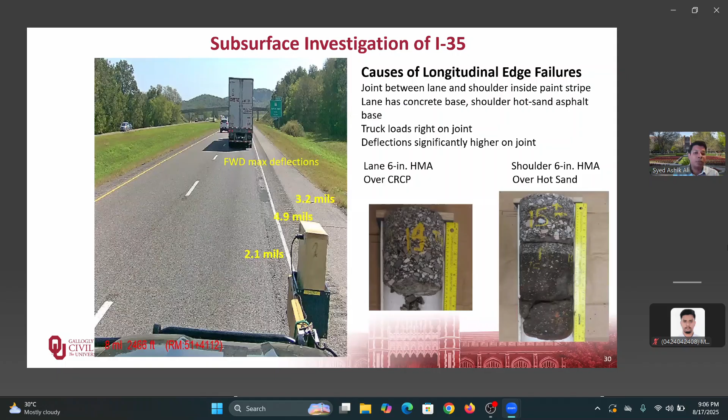I just want to introduce you to another tool that has come out very recently, a replacement for the falling weight deflectometer. It's called the traffic speed deflectometer device. If you search for traffic speed deflectometer, there's a lot of work going on right now. If you are interested, please look into this.

Again, same thing - you do not have to close a lane or have a crew on the pavement. You just run this vehicle, which is equipped with all the equipment it needs. It runs and collects falling weight deflection data as it goes, and from that we can analyze it.

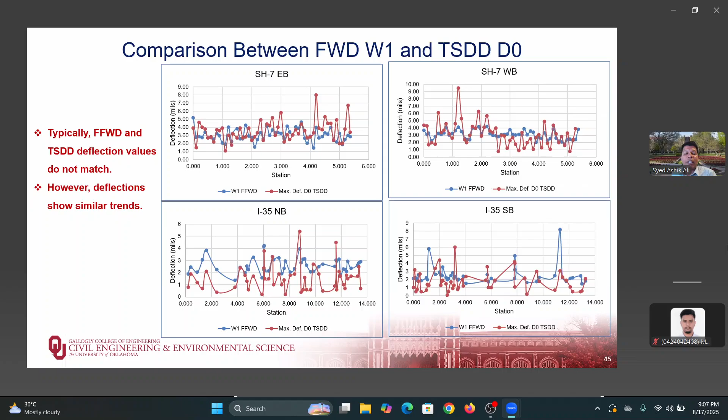We can find the deflection value and the modulus of each of the lanes and everything. That's something we are currently working on with this device a lot. If you are interested, just search for traffic speed deflectometer, and you will get a lot of information.

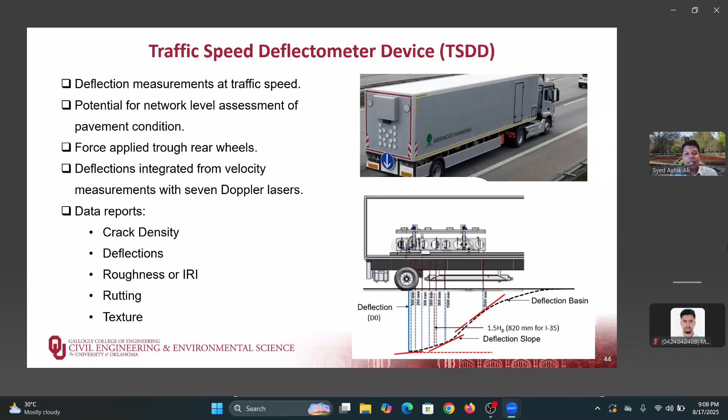I think with that I will stop. I hope I was able to contribute a little bit to your knowledge. If you have any questions, I will be happy to answer.

I'm sorry, I think I took 10 minutes too much. No, it's okay. Thank you, thank you.